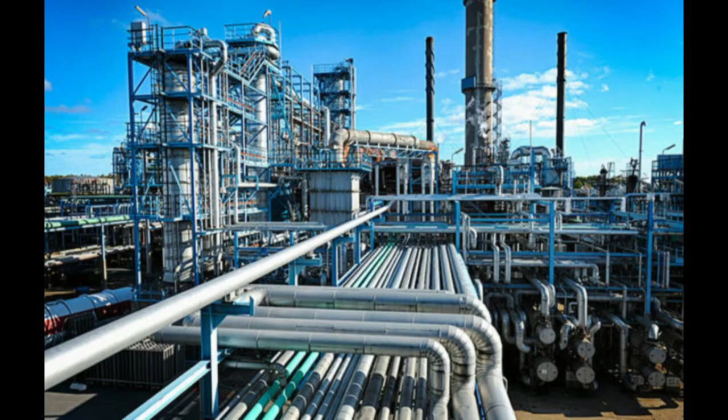Onshore structural design is intricate, so structural engineers need to have a lot of experience while working in this field. They will also need to consult past projects. They will need to get parameters from both internal and external stakeholders. They will also need to consult a lot of codes and instruction manuals.

For example, let's say a structural engineer wants to design the support of a vertical vessel. They will first of all need to get information from the client. They will need to consult past projects to know what has worked and what has not worked. They will then need to get data sheets from the manufacturers.

This data sheet can contain information such as the weight of the vertical vessel, the physical characteristics of the vessel, the dimensions, the possible wind load that will be coming onto the vertical vessel, as well as the bottom plate dimensions of the support of that vertical vessel. These are key information that the structural engineer uses as an input to commence his own design calculations.

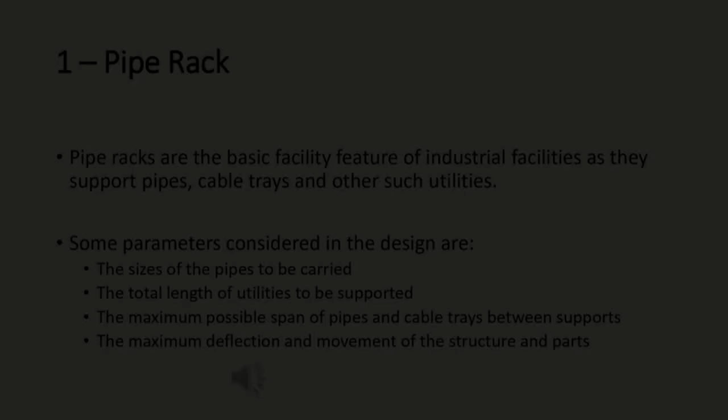The following are the steps to take while designing the pipe rack. First, obtaining of the layout of the pipe rack from the project engineering managers or the clients.

Second, configuration of the structure. This involves selecting the span-to-span distance of each frame cross-section along the length of the pipe rack system.

The maximum distance between each frame should be determined so as not to have pipes which are excessively spanned and then they will begin to sag.

Third, estimation of loading from pipes, cable tray, and other equipment attached on the beams and other supports.

Fourth, determination of other loads in accordance with relevant codes. Aside the pipe loading, you need to get the dead loads for all the other members. Also, you need to get the test dead load of the pipes and the operating dead loads.

This involves having an idea of the fluid that will be used for test and that will be used during operation. You also need to get the live loads, wind load, and earthquake loads.

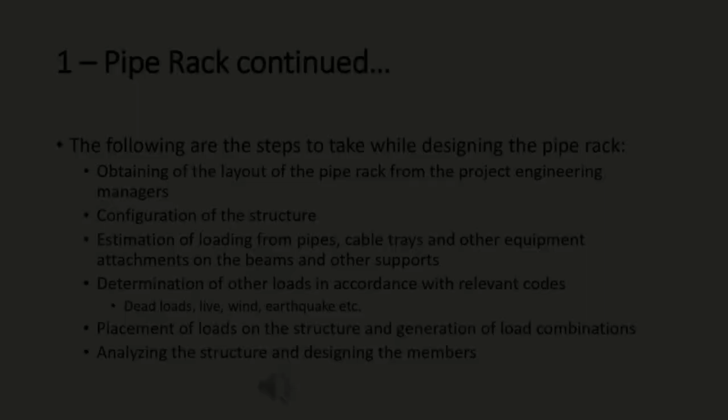Sixth, analyzing the structure and designing the members. So you will see here some pictures.

The first picture you will see here is the general layout of the pipe rack configuration from STAAD Pro. You can see the pipe rack frames and the distances between each of the frames.

Also attached to the pipe rack system is an open frame structure. This open frame structure is what houses the steps that give access to the top of the pipe rack.

In the next picture, you will see some load arrangements for dead load for the open frame structure.

Next, you have the wind load, which acts upon the open frame structure as well as the pipe rack structure.

When these have been analyzed and the support reactions and moments have been obtained,

those points of support are then transferred to STAAD foundation. The last photo you see there are the points of support for the pipe rack and the open frame structure.

Those points are then designed for the isolated footings that support the pipe rack and open frame structure. And because the soil bearing can handle it, we have used isolated footings for the foundation support.

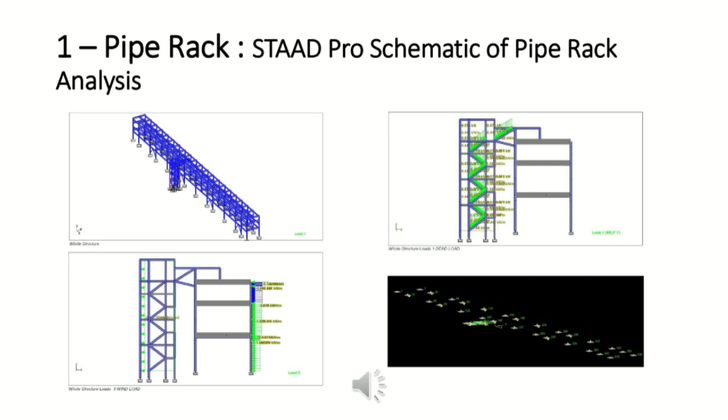The second facility feature we'll be designing is the horizontal vessel.

In this case, as a structural engineer, when you work on horizontal vessels, your concern is the support of these vessels, not the vessel itself.

Most times the vessel is obtained from an external manufacturer. Horizontal vessels are structures which contain and usually process fluids and span more in the horizontal direction.

Some parameters considered in the design of the footing of the supports are the sizes of the vessel to be carried, and the likely purpose of the vessel.

For example, it could be a heat exchanger or an oil separator. The manner in which the support of a heat exchanger moves is different from how an oil separator might move.

This is due to, for example, the bundle pull effect, which you will learn later. Another parameter to consider is the properties of the selected horizontal vessel.

Such properties as the center to center distance of the supports, the positions of the bolt points on the saddle, that is the supporting plate of the horizontal vessel.

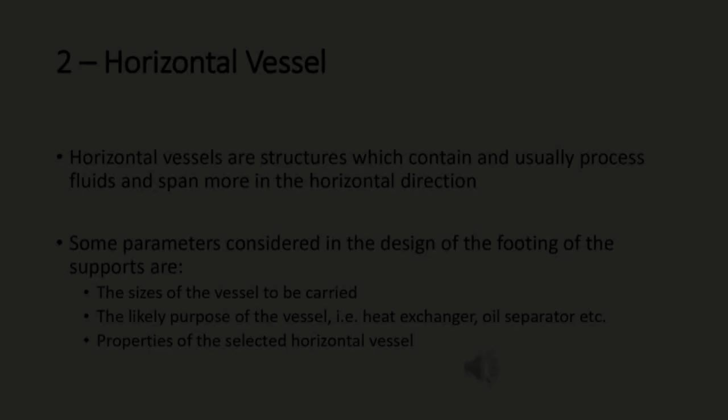The following are the steps to be taken while designing the foundation of a horizontal vessel.

First, obtaining of the template of the saddle, which is the supporting plate connected to the horizontal vessel, and other dimensions of the horizontal vessel from the manufacturer.

Second, configuration of the footing positions. Third, estimation of loading from the vessels, pipes, and other equipment which are attached.

4. Determination of other loads in accordance with relevant codes. For example, the dead loads, the test dead load or operating dead load, live load, wind load, earthquake load, thermal load, bundle pull load. 5. Designing the steel slide plates. Designing the pier after doing sizing. Footing sizing and design.

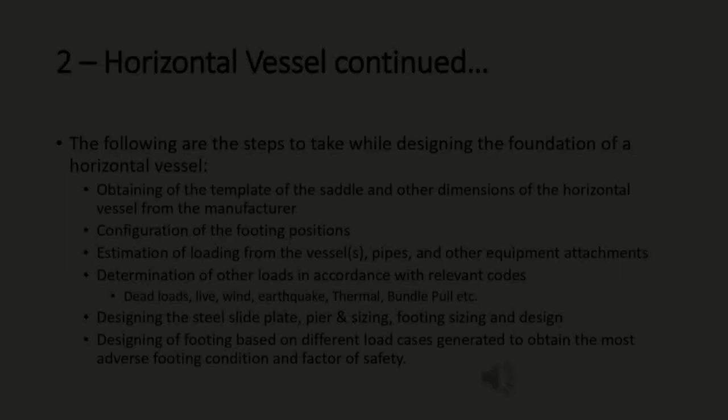6. Designing of the footing based on different load cases generated to obtain the most adverse footing condition and factor of safety. For a horizontal vessel, the number of calculations and load cases to be considered may be large due to the different conditions and the different nature of the supports. So the calculation may be more involved. So you also see here, I've put in pictures of design of footing from STAAD Foundation.

So after you've gotten the basic information like the distances, the parameters, the characteristics of the horizontal vessel, you've also done preliminary calculation of the sizing up to the point of the plates on top of the pier, and probably also the size of the piers. Once you have gotten that information, the next thing is to open your STAAD Foundation application and plug in those values. Those values will then help you to calculate the footing and to also design the footing that supports the horizontal vessel.

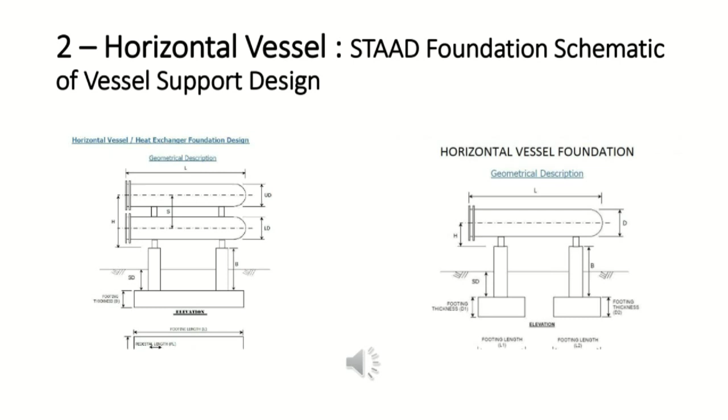The next feature to be designed is the vertical vessel. Vertical vessels are structures which contain and usually process fluids and span more in the vertical direction. They could also accommodate traffic. When I say accommodate traffic, there could be connections of platforms around it to allow people or allow for certain forms of inspection. Also, there are cases where you have steel structural frames that are surrounding the vertical vessel, so people are able to access different levels of the vertical vessel for whatever purpose.

Some parameters considered in the design of the footing supports for these vertical vessels are the sizes of the vessel to be carried, the likely purpose of the vessel, properties of the selected vertical vessel. Just as we have for horizontal vessels, vertical vessels are also supplied by the manufacturer, and they provide the data sheet of those vessels. So the information from the data sheet is what the structural engineer takes as his own input to commence his own calculations.

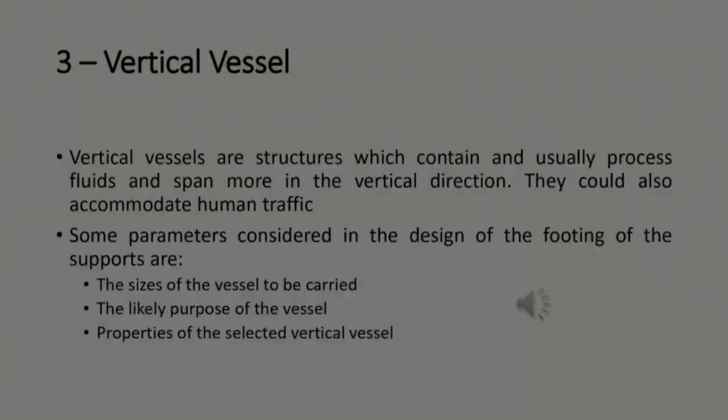The following are the steps to take while designing the foundation of a vertical vessel. 1. Obtaining of the template dimensions of the bottom plate support of the vertical vessel from the manufacturer. 2. Selection of footing shape. 3. Estimation of loading from the vessels, pipes and other equipment attached. 4. Determination of other loads in accordance with relevant codes. Again, you also have dead loads, including those from the test and the operating fluid. You have live load, wind load, earthquake load, and thermal load.

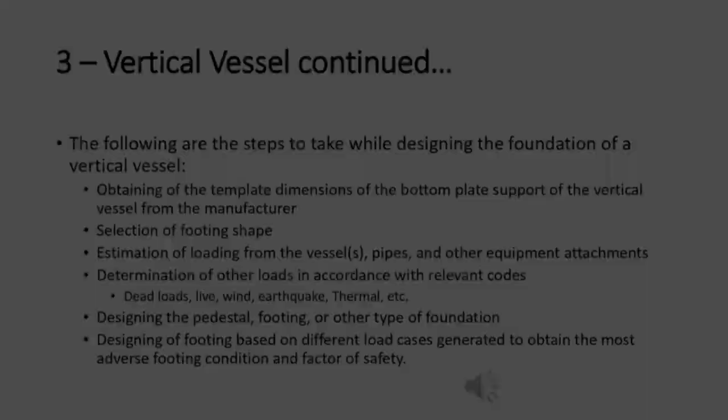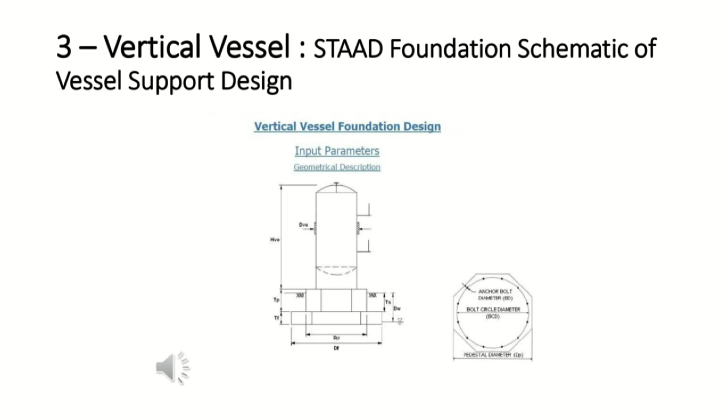Like the other case for horizontal vessels, there are several parameters that you plug into the application before you commence your design. So most likely the calculations by hand you will need to do are to obtain the initial loads, the diameter of the bolts that are being installed, most of which come from the data sheet of the manufacturer of the vessel. Then with some preliminary calculations that you have done, you'll be able to go ahead and use the software to design the footing of the vertical vessel.

Another facility feature to be designed is the storage tank. For the purpose of this video and scope, storage tanks are large, usually cylindrical above-ground tanks made of metal or concrete for the storage of fluids. They also accommodate as attachments structures which allow for human traffic.

These storage tanks, as opposed to how you have the vertical vessels and the horizontal vessels, storage tanks are actually designed completely by structural engineers. The metal plates to be used and their sizes are designed by the structural engineer, as opposed to all those other vessels which are supplied by the manufacturer.

Some parameters considered in the design of storage tank and foundation are the required capacity of storage, the purpose of the storage tank, overfill and height characteristics of the tank. Some of these parameters will be provided by the client who requires some services to be rendered. So they will tell you what need they have to be satisfied. The following are the steps to take while designing the tank body and the foundation.

1. Obtaining of the capacity and overfill level of the tank. 2. Selection of the type of roof. For example, for storage tanks, the kind of roof that will be used are of different types. There are fixed roofs and there are floating roofs. It all depends on the kind of product that is being stored and some other reasons that you select a particular kind of roof. 3. Determination of thickness of the shell. The shell is the body and the roof.

4. Estimation of loading from the stored fluid. 5. Determination of other loads in accordance with relevant codes. Again, you have dead loads, live load, wind load, earthquake load, thermal load. 6. Designing of the bottom plate thickness. 7. Design of the soil bearing of the bottom of the tank. Designing of the tank wall supporting beam and other types of foundation support.

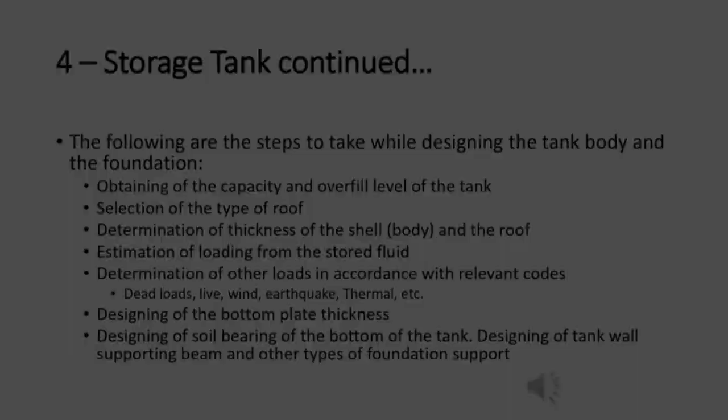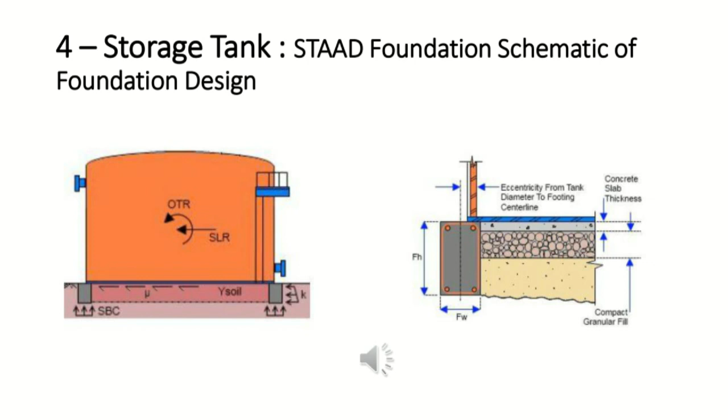So in all, I've discussed 4 basic facility features that are designed for. Firstly, I discussed the pipe rack. Secondly, I talked about horizontal vessels. Thirdly, I spoke about vertical vessels. Number 4, I just spoke about storage tanks. These are the basic features in this kind of industrial facilities.